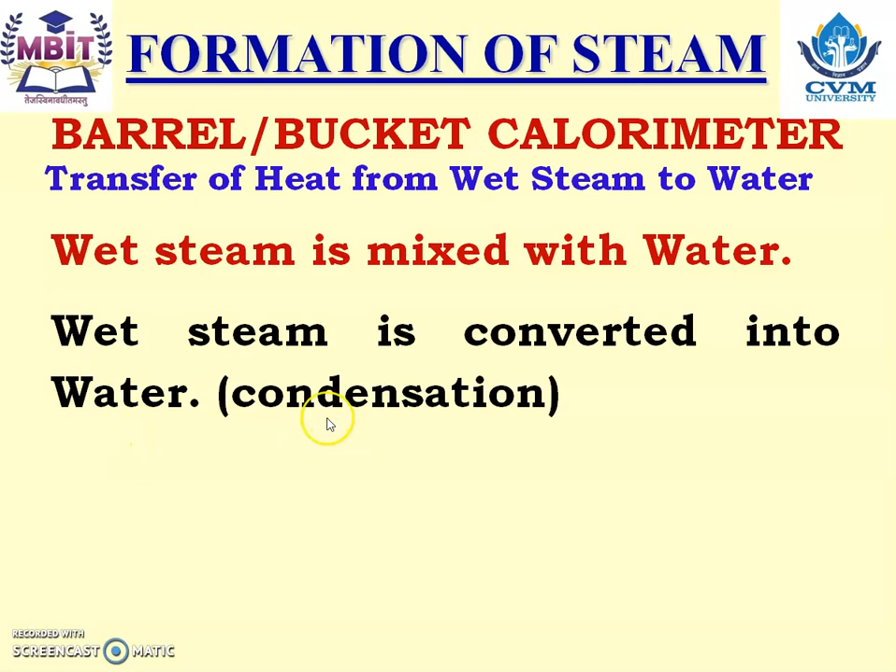The topic included in today's lecture is construction and working of barrel or bucket calorimeter. Barrel or bucket calorimeter. It works on the fundamental of transfer of heat from wet steam to water. Here, wet steam is mixed with the water. Wet steam is converted into water, that is due to condensation, and heat of wet steam reduces and heat, that is enthalpy of water, increases.

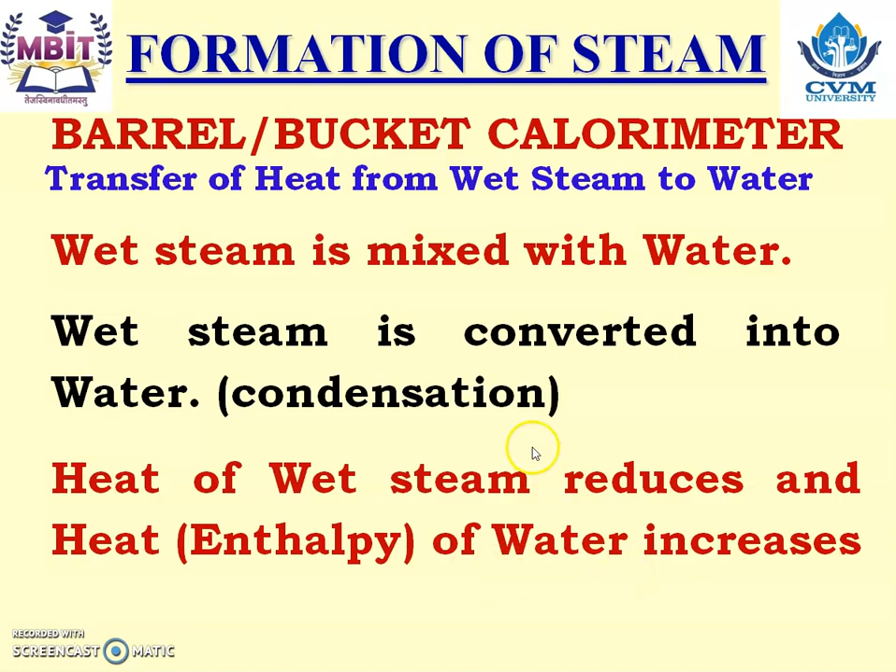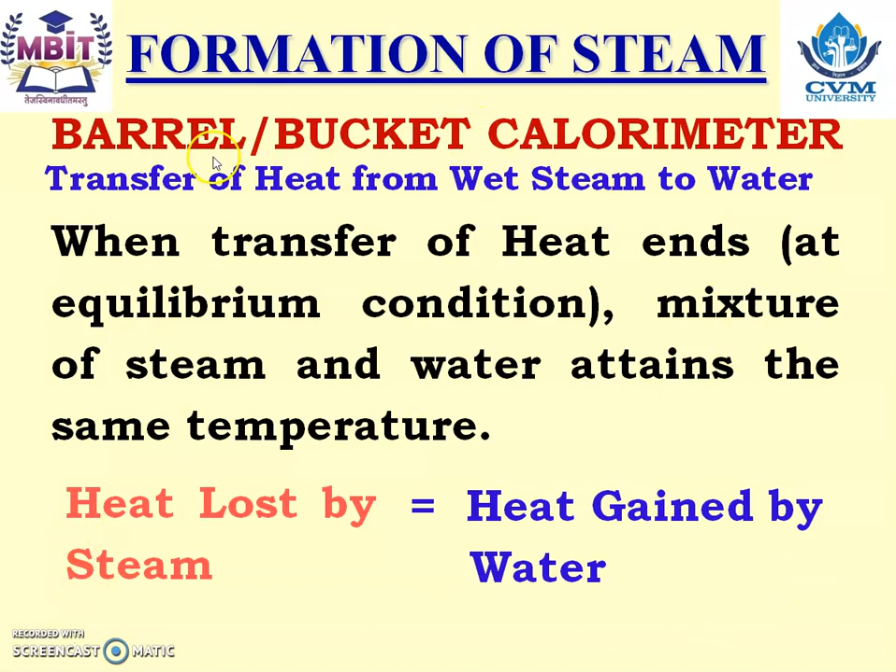So it works on the fundamental of enthalpy or heat balance, because whatever the heat is removed from the wet steam, the same heat is gained by the water. So when transfer of heat ends at equilibrium condition, mixture of steam and water attains the same temperature. And therefore, heat lost by steam is equal to heat gained by the water. So this is the fundamental on which the barrel or bucket calorimeter works.

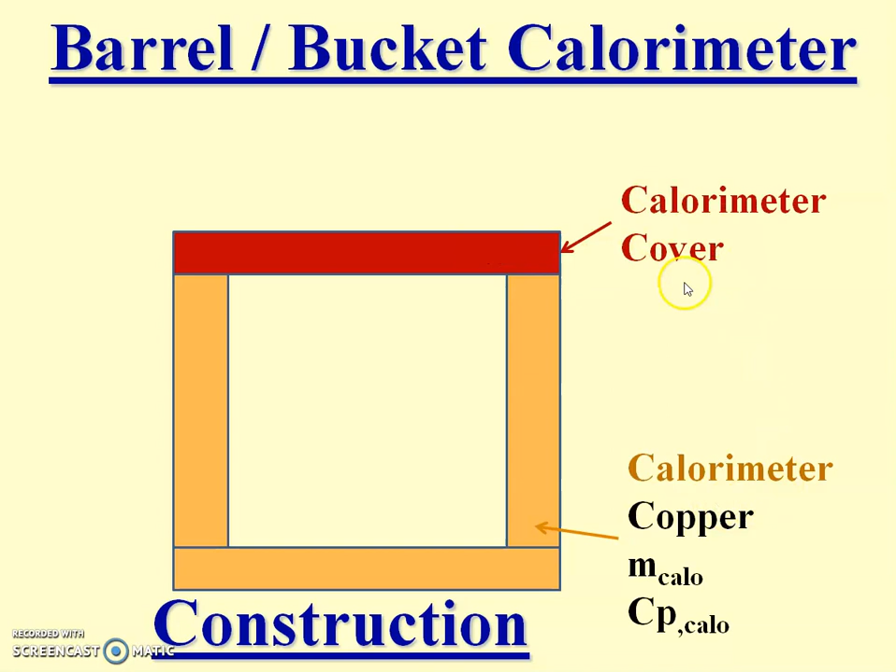Now let us see the construction. So it has a vessel made up of copper, and it is known as the copper calorimeter. Mass of that copper calorimeter is M calorimeter, and Cp, that is specific heat of the calorimeter, is Cp of calorimeter. On the top, calorimeter cover is fixed. It is filled up with the mW mass of water. So mass of water is known to us, and the specific heat of water, that is Cp of water, again it is known to us.

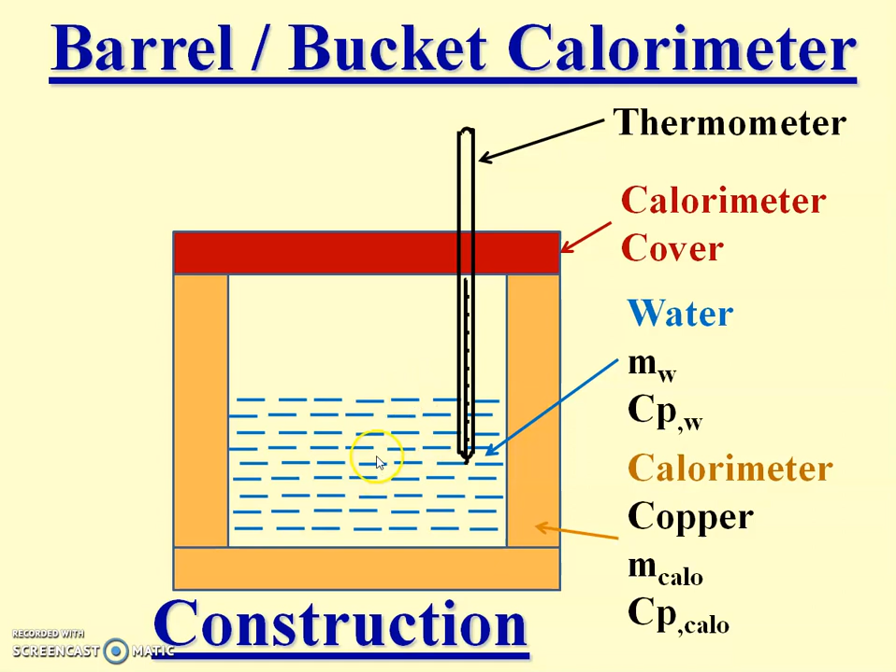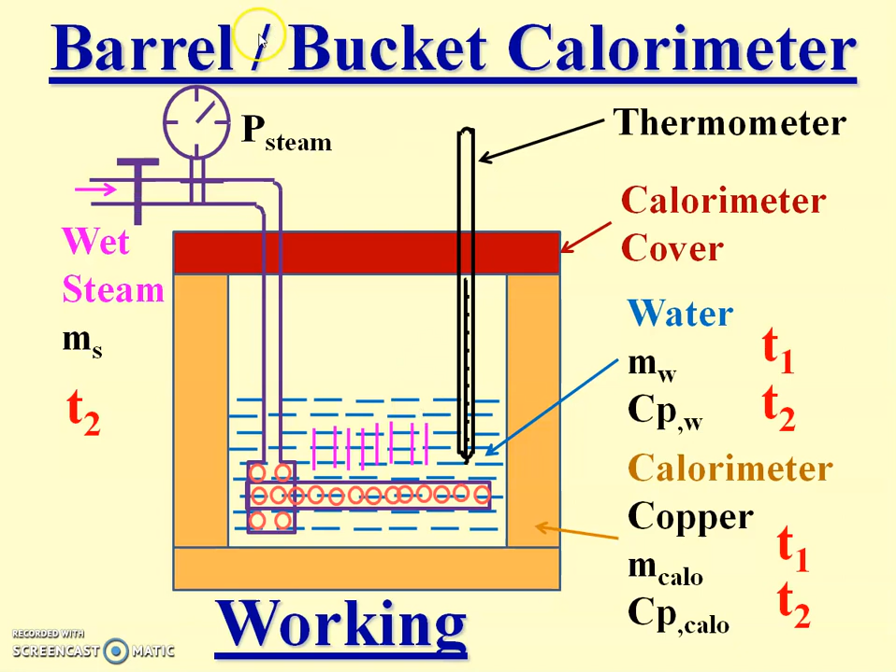The steam from that perforated pipe mixes with the water and is converted into water. Due to that the temperature of mixture of water and steam increases, and that increase in temperature can be recorded with the help of the thermometer. So let us say T2 is the final temperature of water and calorimeter. Water means mixture of water and steam after the steam is mixed with the water, and after particular time the valve is closed.

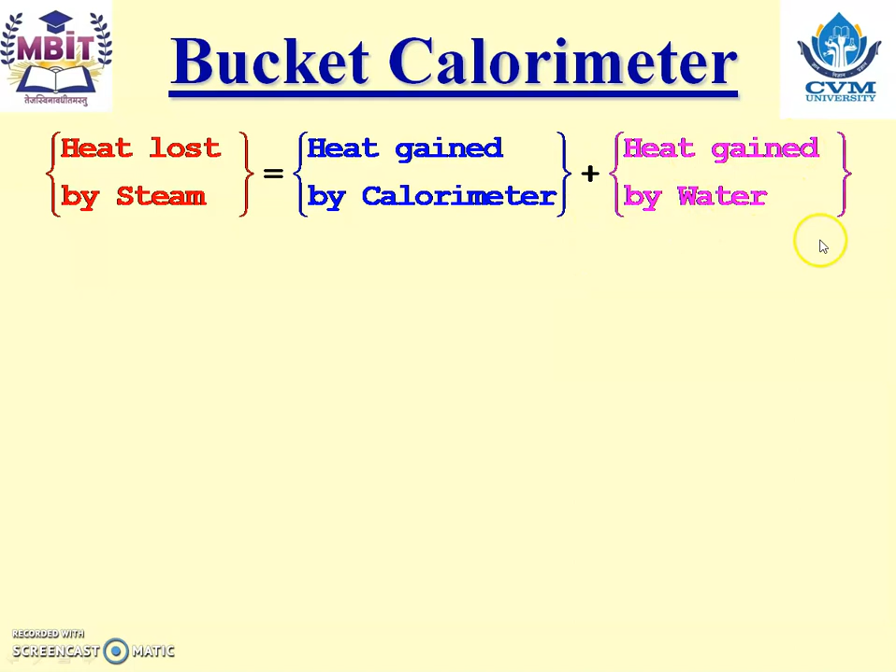Now let us go for the derivation of equation for the bucket calorimeter using the heat balance. Heat lost by the steam is equal to heat gained by the calorimeter, that is the copper calorimeter vessel, plus heat gained by the water. Now Ms, the mass of steam, multiplied by enthalpy of steam initial minus enthalpy of steam final, because the enthalpy of steam reduces, gives us the heat lost by the steam.

Heat gained by the calorimeter, equation is easy, mCp delta T. So mass of calorimeter multiply by Cp of calorimeter multiply by T2 minus T1, plus heat gained by the water. Again equation is easy, mCp delta T: mass of water multiply by Cp of water multiply by T2 minus T1. Now let us go for that.

What is the condition of steam at initial? Yes, it is a wet steam, because we want to measure the dryness fraction of that steam, and so we have entered it into the calorimeter. So initial steam is wet steam, enthalpy of wet steam initially minus enthalpy of steam. What happens to the wet steam? When it mixes with the water, it becomes liquid. So enthalpy of steam liquid, that is final, equals to the mCp delta T for calorimeter plus mCp delta T for the water.

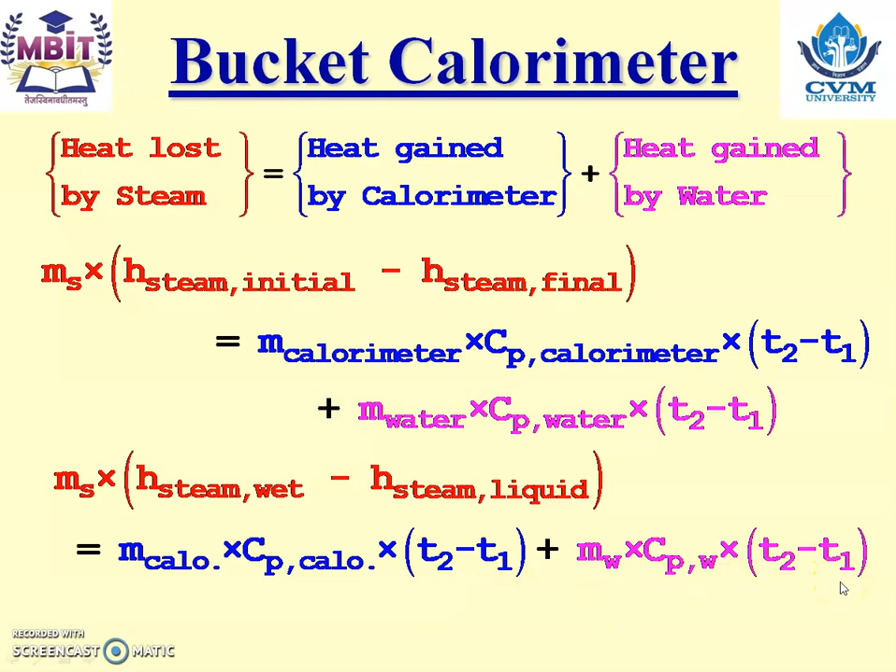Now, what is the equation to calculate the enthalpy of steam wet? Just now we have studied it is HF1 plus X into HFG1, where HF and HFG can be calculated using the steam table at the pressure that we have measured using the pressure gauge. X that we want to calculate, and HF2 is the enthalpy of liquid after it mixes with the water and converted into water. And the right hand side, mCp delta T for the calorimeter plus mCp delta T for the

water. Now, which is common on the right hand side? T2 minus T1 is the common. So let us take it common. So what is inside the bracket? Mass of calorimeter into Cp of calorimeter plus mass of water into Cp of water. Left hand side as it is.

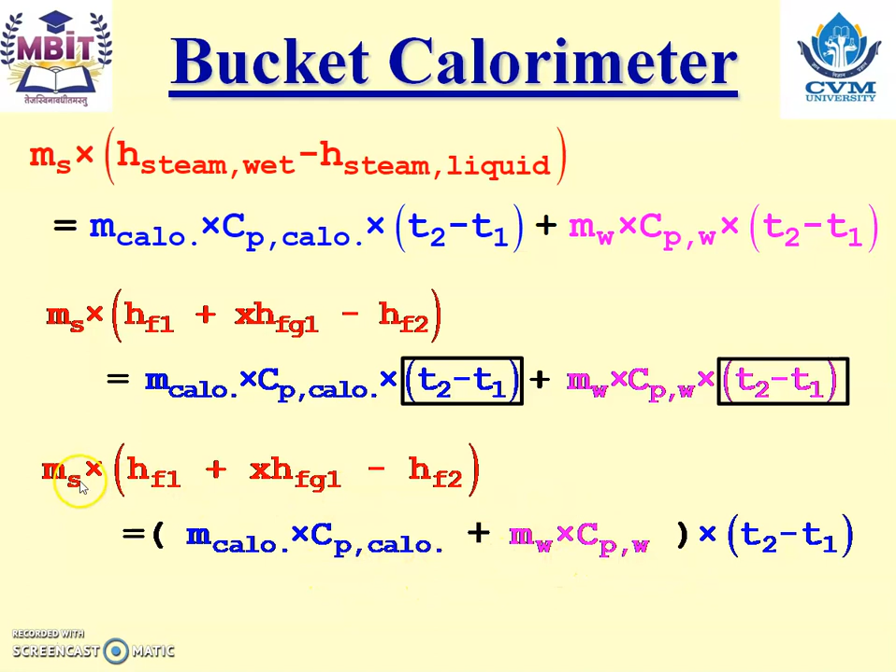Now, let us take Cp of water common from this bracket. Left hand side as it is. Cp of water we have taken out. So what will be inside the bracket? Mass of calorimeter multiplied by Cp of calorimeter divided by Cp of water plus mass of water, bracket over, multiply by Cp of water multiply by T2 minus T1. Left hand side as it is.

This term is known as the ME. And that ME is what? ME is water equivalent of calorimeter. So sometimes in numericals, they don't give us the mass of calorimeter and Cp of calorimeter. Directly they give us the water equivalent of calorimeter. That is, ME directly is given in the numerical. So that is the equation, and ME is the water equivalent of the calorimeter.

Now let us see. Mass of steam given in the numerical. HF1, HFG1 that we can calculate using the steam table. X we want to calculate. ME given in the numerical, mass of water, Cp of water, T2 minus T1 given in the numerical. So if you want to calculate X, we must have the HF2. But we don't have the pressure after mixing of the steam with the water. So how to calculate the HF2?

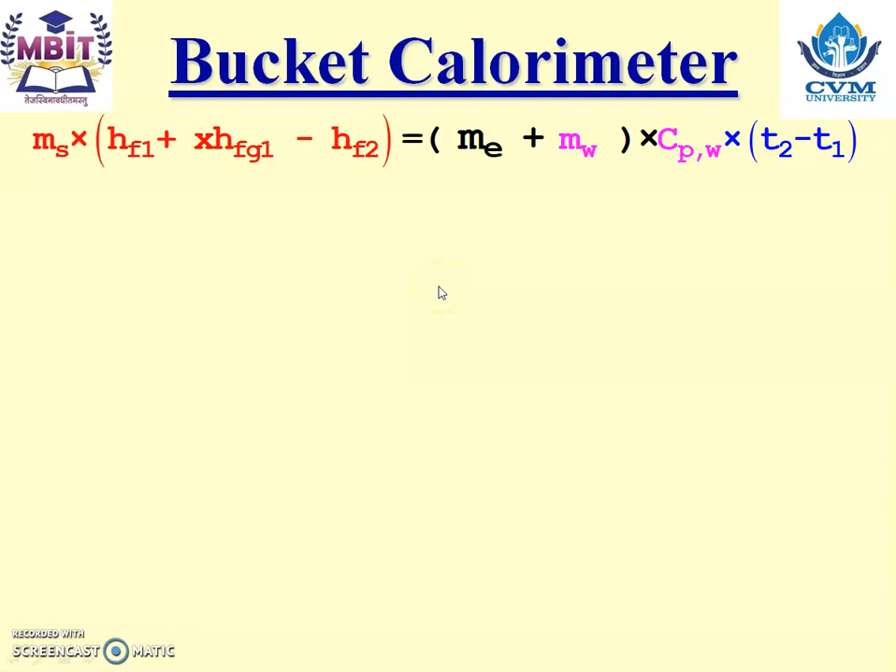Yes. Right? Where ME is the water equivalent of calorimeter, mass of water, Cp of water, T1 initial temperature, T2 final temperature, Ms mass of wet steam. HF1 and HFG1 can be read from the steam table at pressure of steam given in the numerical, and also we know that we measure it while we enter the steam into the calorimeter using the pressure gauge. But HF2 we have to take from the temperature based steam table at T2.

Now please understand, temperature based steam table. So this is the only application in our syllabus where we have to take the data from temperature based steam table at T2. Now what is T2? Final temperature of mixture. So whenever the steam mixes with the water and it attains the final temperature T2, at that T2, using the temperature based steam table, we have to calculate the value of HF2, and then we can calculate the value of X, that is the dryness fraction, using bucket calorimeter.

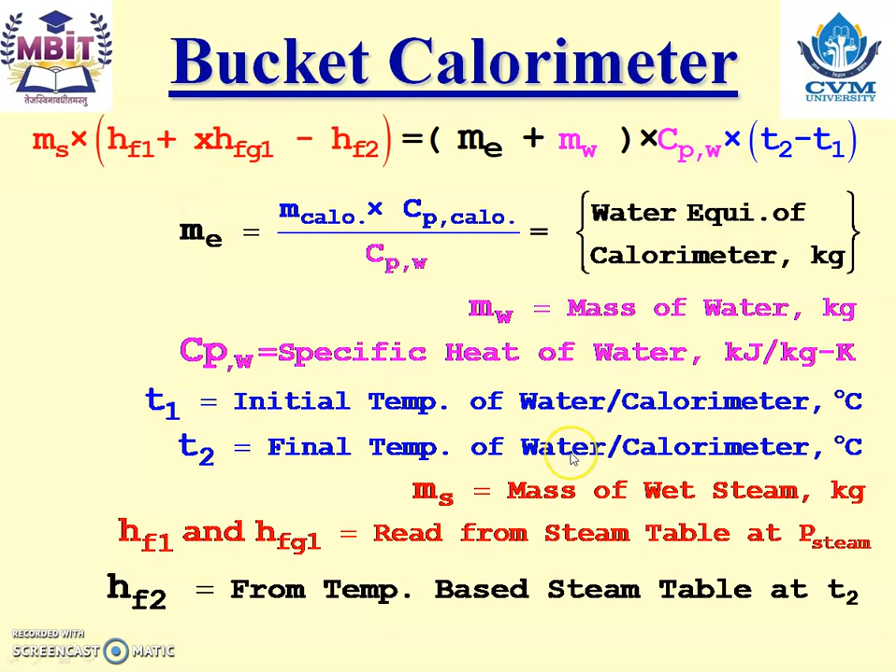HF1 and HFG1 read from the steam table at pressure of steam. So that is a pressure based steam table. First column is pressure, and using that table we can find out the HF and HFG, that is our HF1 and HFG1.

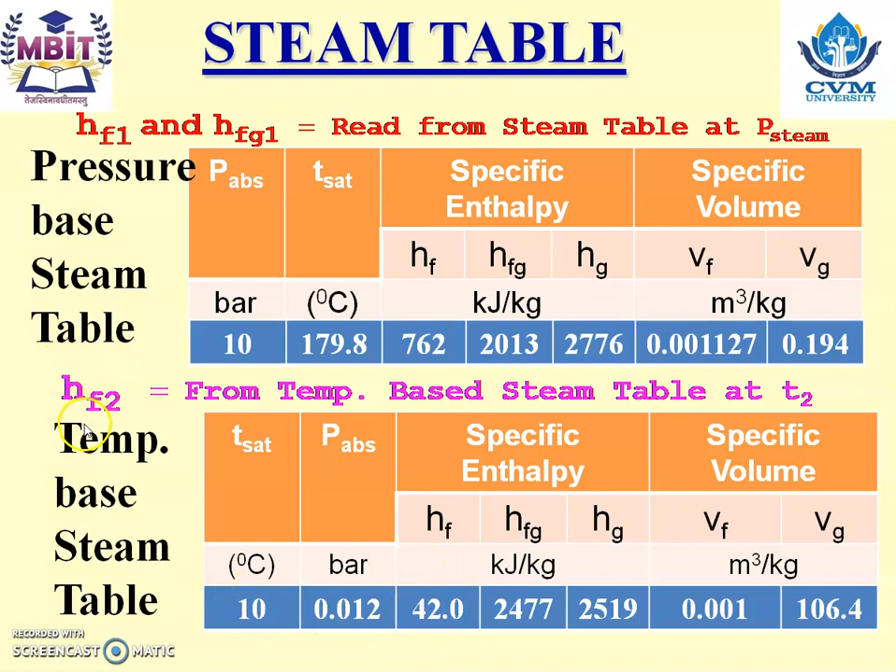HF2 from temperature based steam table at T2. So whatever the T2 is given in the numerical, we have to go for the temperature based steam table, in which the first column is temperature, that is saturation temperature, and at that particular given temperature we have to find out HF, and that HF becomes our HF2. That is for the numerical solution.

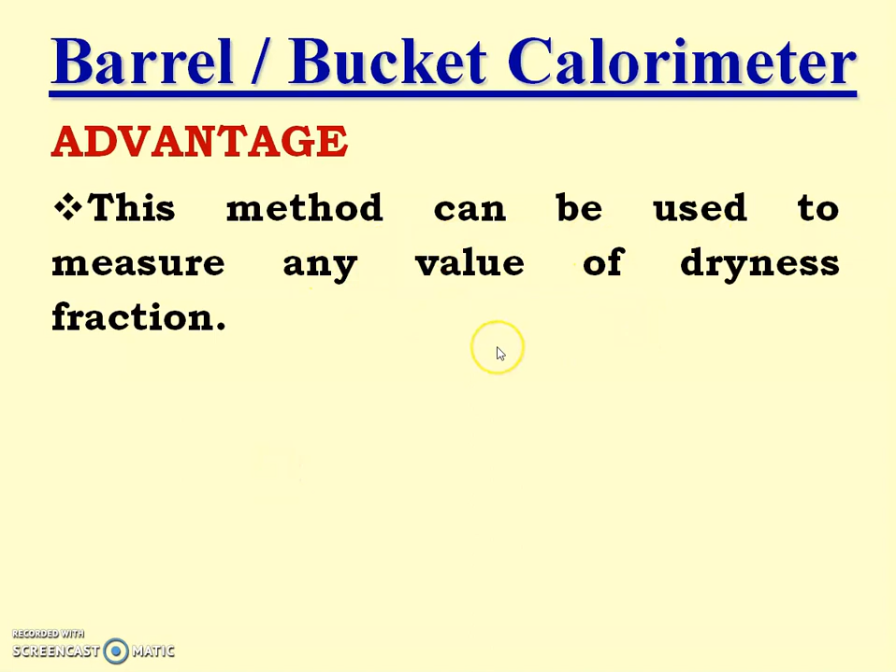Advantage: this method can be used to measure any value of dryness fraction. Limitation: there is always heat loss from the calorimeter, so it gives only approximate value.